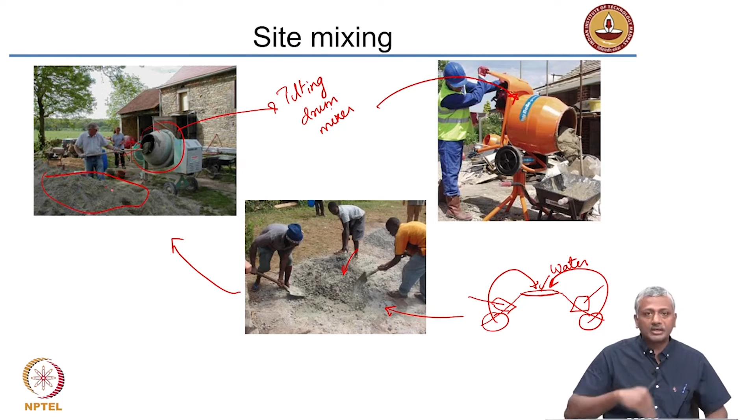This is a more controlled site, as you can see from the proper protective equipment this person is wearing—reflective jacket, helmet, steel-toed shoes, and so on—and the mixer is dispensing the concrete into this wheelbarrow.

That is called a wheelbarrow, and that is what the person uses to take the concrete and deliver it to where it is supposed to be going. A wheelbarrow is used for delivering.

In such cases, after mixing the concrete, these guys will put it in small containers, and you might have seen in our construction sites labourers carrying these containers on their heads, passing it around to the next person, who will finally dump it into the formwork.

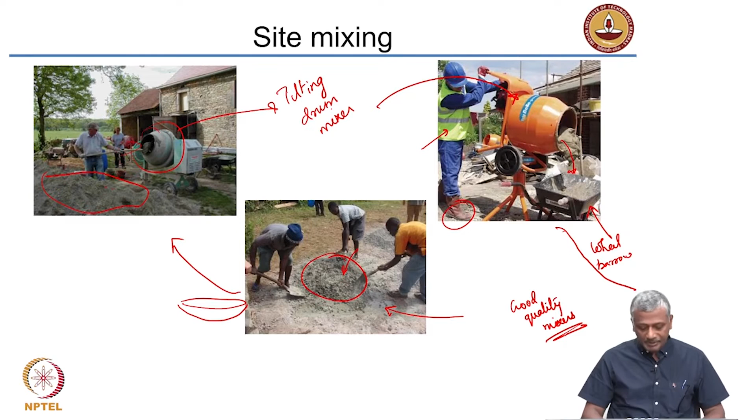Now, when we want to get more sophisticated, we need to invest in what are called centralized mixing plants. I am not saying you can't do this on site—sometimes such sites can also provide good quality mixers that can take care of weight batching as well as very good mixing of the concrete before it is delivered to the site. But in most cases, for good quality, we rely on these centralized batching plants.

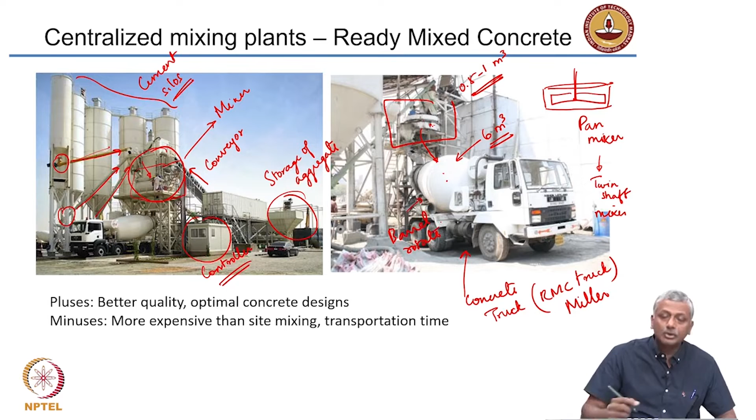The truck has a barrel which can rotate, and this barrel can be rotated to continue mixing the concrete that is getting dumped from the centralized plant.

You may have noticed that when these trucks go from the plant to the job site, they have a very slow rotational movement. Why do they do that? Because they do not want the concrete inside to set or start getting separated.

You want the concrete to be intimately mixed, and when the truck reaches the job site, they rotate the drum at a faster speed. While traveling, it only slightly maintains agitation to ensure the concrete does not set. When it reaches the job site, it is mixed again, homogenized at a much higher speed, and then discharged into the formwork.

Overall, when you use ready mix concrete from a centralized mixing plant, you get better quality and much more optimal concrete designs. You can control the quantity of water and cement to optimal levels. In most cases, these ready mix concrete systems will invariably have mineral and chemical additives in the concrete mix.

Of course, all these processes make it more expensive. Secondly, if your travel time is unpredictable—for example, in Indian cities, traveling from one location to another can be highly variable depending on the time of day—the transportation time could be a drawback associated with ready mix concrete.

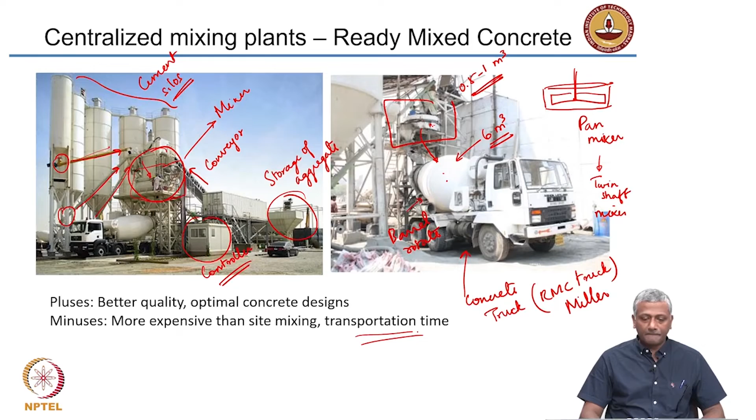Now, after the concrete has been mixed on large sites, you can convey it using different systems. In some cases, you can convey it using conveyor belts.

For example, if you have your construction site where the concrete needs to be delivered over long distances, but they are not so far that you need to send the truck away, you can usually use a conveyor belt.

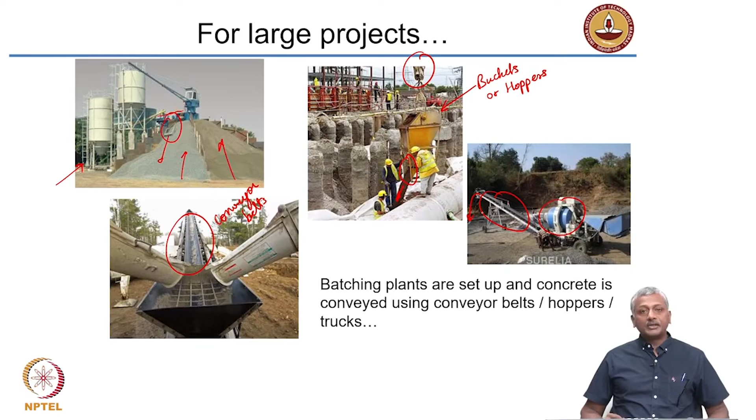Another common thing you see in most construction sites today is the use of boom placers. A boom placer has an extended arm connected to a pipe, and you discharge the concrete into a pump at one end. The boom placer carries it across that pipe and is able to access very large areas. It's major equipment used in most construction sites where a large quantity of concrete needs to be placed today.

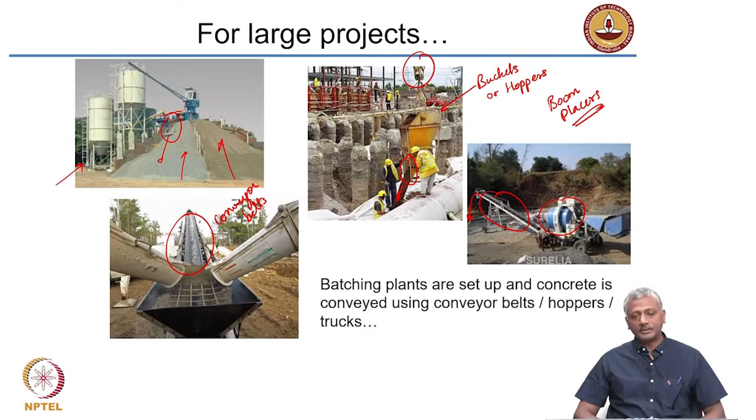So as far as possible, concrete should be poured directly into the desired location. Raking and pushing should be avoided as much as possible. The chutes, which are the pouring devices for the concrete, should pour concrete usually vertically down into the formwork.

In some cases it's unavoidable that you do a slanted chute, for instance when it's coming directly from the truck's dispensing equipment. But when concrete is conveyed through a pipe, the pipe can be made vertical and the concrete discharged vertically. If it's not done this way and the pipe is at an angle, the material may reflect off the bottom and separate into different sizes—coarse aggregate rebounds more, finer material settles to the center, causing segregation. So it's better to discharge it vertically.

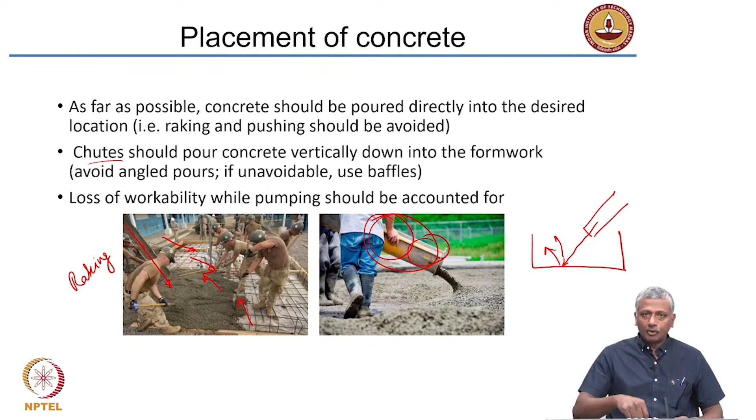Loss of workability may happen while pumping. Imagine a high-rise building: the concrete truck reaches the bottom, but you're on the 15th floor. You create a pipe system that carries the concrete from the ground floor to the 15th floor by applying pressure through a pump that pushes it through the pipe to the top.

As concrete flows through this pipe, there is bound to be some friction, and that friction can reduce the consistency or workability of the concrete. Enough pressure needs to be applied for the concrete to travel through the pipe and come out on the 15th floor with the required workability. So you need to design the concrete at the ground floor with sufficient workability so that any losses from pipe travel can still be compensated for at the point of pouring.

For example, at the point of pouring, if you want a slump of 100 millimeters, you need to design the concrete for conveyance at the ground floor for nearly 150 millimeters, to ensure that any losses in slump during the flow in the pipe can be avoided.

Now I don't know how many of you are aware of this. For Burj Khalifa, the tallest building in the world, concrete was pumped over a vertical distance of 600 meters, from the ground to a level of 600 meters. That's the world record in pumping concrete to a vertical distance. That concrete was such that it could actually compact on its own. I'll show you an example of that. You had to maintain that workability at the point of discharge on the 600 meter level, and that's not an easy job to do. So you need to plan that quite well, design the concrete appropriately, and so on.

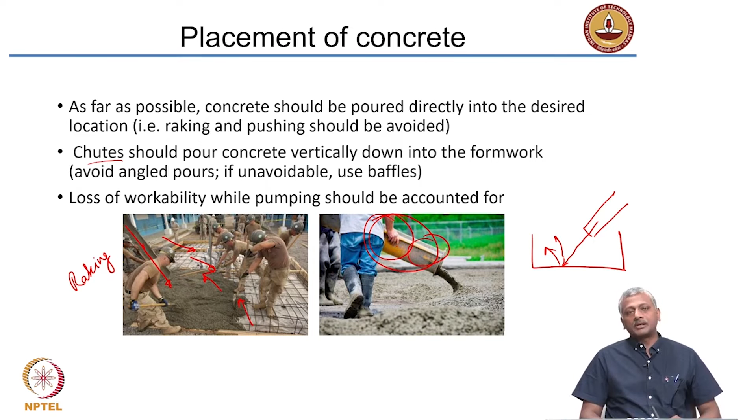So you can have problems while placement. If the concrete has not been designed properly, you can get problems like segregation and bleeding. What is segregation? Essentially it's caused by settling of the coarser particles down while the lighter or finer particles float on top. So usually you have the cement paste floating on top and the aggregate settled at the bottom. This happens when you have insufficient fines in your mix. That means either the fine aggregate content is low, or you may have less amount of cement in the mix, and that will cause this problem of segregation.

If you have too much water, you will cause what is called bleeding. Water basically is the lightest ingredient of the concrete, so because of gravity, the water rises to the surface and forms a layer there. That's basically called bleeding. While this bleed water on the surface helps to some extent in finishing and reduction of shrinkage cracking, the problem is it's going to locally increase the water to cement ratio, because more water is there, less cement is there. So the water to cement ratio at the top of the concrete slab will be higher, and a higher water cement ratio automatically gives a lower strength. So this is not a desirable situation. You don't want segregation and bleeding to happen on the site.

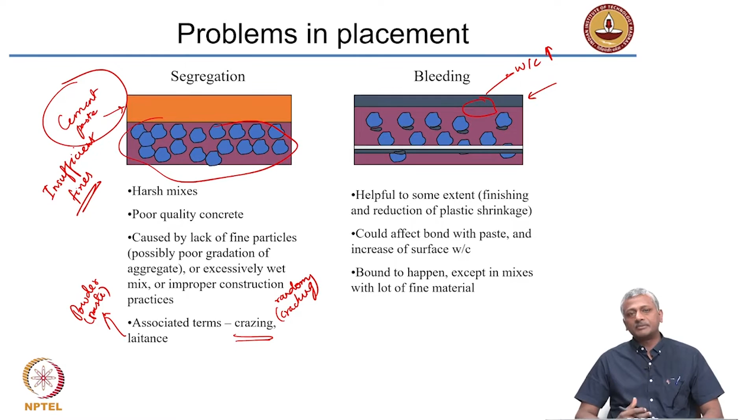Very often when you get cement paste on the surface — I told you before that cement paste shrinks — if you form this layer of cement paste on the surface, it will shrink and then start getting cracked. That cracking is called crazing. You get these crazing cracks, and sometimes the cement paste will dry off as a powder and come out, and that's called laitance. The cement paste dries off as a powder and basically gets removed from the top surface. That's called laitance. Crazing and laitance are a major problem — crazing is basically random cracking of the top surface. So if you lack fines in your mix, either fine aggregate or enough cementitious materials, you are going to cause these problems of segregation and bleeding.

So you have placed the concrete now. The next step is to compact it, because you have a reinforced concrete structure. When you are pouring the concrete, it may not properly go around the reinforcement and encapsulate it. To ensure that happens properly, you need to compact it, or consolidate it. Compaction or consolidation is done with the help of vibrators, and vibrators can be of different types. You can have an external vibrator, which is basically a device attached to the surface of the concrete or to the formwork itself, causing the entire formwork to shake. That's called an external vibrator.

Or you can have an internal vibrator, like what these people are doing. You see this guy holding a needle — that's a needle vibrator. It's a vibrating needle again here. So a needle vibrator basically is a rod of steel which is made to vibrate at a very high frequency — we are talking about 4000 to 5000 hertz. It vibrates at a very high frequency.

So what it does is loosen up the concrete so that it starts flowing. Concrete which is very stiff, if it's dumped into the formwork, will not go anywhere. But as soon as you put your vibrator inside, vibrating at such high frequencies, it loosens up the aggregate and gets the concrete to flow, and that creates the compaction. External vibrators are placed on the formwork or on the surface and cause the concrete to vibrate and compact. Internal vibrators are the needle vibrators, which are poked into the concrete. These needle vibrators are also called pokers.

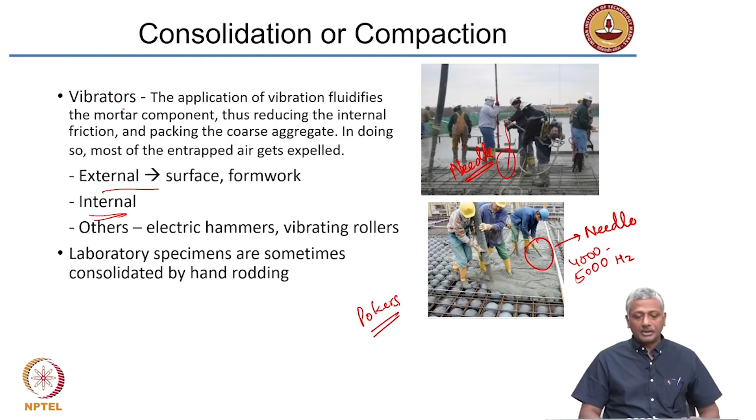So I was saying that you need to establish ways of putting concrete with minimal vibration. So here, before I go to that, I am just showing you a scenario of how this needle vibrator basically is used. The vibrator basically pushes into the concrete. So if you have the first layer of concrete here and the second layer that is coming on top of it, the vibrator should go all through the depth of the second layer and just into the first layer to ensure that there is good jointing between the layers. Otherwise, you will have a problem of creation of cold joint.

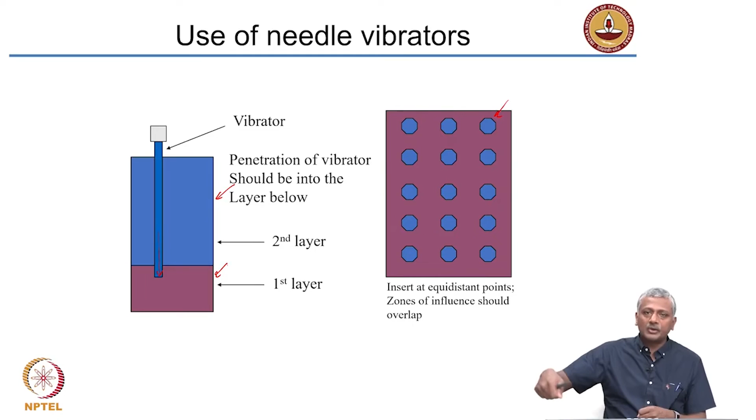Second, the vibrator needle should be placed at equidistant intervals into the concrete, and that ensures that you have proper compaction all through. Depending upon the area that you want, you can have a zone of influence around the vibrator that ensures that the concrete around that zone gets compacted properly. So you need to calculate properly as to where you need to put the next poke of the vibrator.

A self-compacting concrete basically compacts under its own self weight. It does not need additional vibration for compaction. So this use of self-compacting concrete can bring down the number of vibration-related injuries on a job site. So it is highly preferred now in many construction sites to use self-compacting concrete.

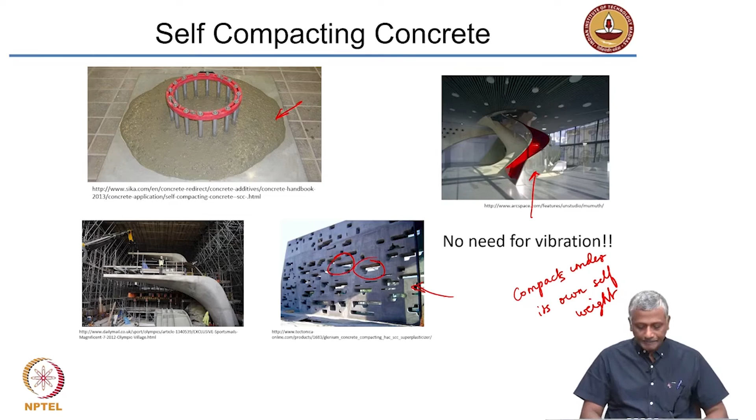After the concrete has been poured and compacted, it needs to be leveled to ensure that the top surface is exactly where you want it, and then finished. The leveling process can be done with the help of screeding. Screeding basically is removal of excess material from the concrete surface, so you fill up more than what you want and remove the part that is not necessary. Finishing can be done using several methods, one of which is called floating.

I will show you an example of this in the next couple of slides. You have troweling. You can use these trowels, which you see a mason handling in a typical masonry job also. That same trowel can be used to finish the surface of the concrete.

Now, in some cases you may want to texture the surfaces. Texturing is very interesting. I will come to applications of texturing in just a minute.

The initial finishing operations, after you level the concrete, are done immediately after completely placing and consolidating the concrete. This is followed by a final finishing. Final finishing is done when the concrete is able to withstand foot pressure.

The workman should be able to stand on top of the concrete slab or structure that has been laid. This is only valid in the case of slabs. In the case of beams and columns, you don't have to stand on it to compact or finish it. But in slabs, large area structures, you may want to stand on it to do the final finishing operations. So the concrete should be somewhat stiff to resist the pressure of the foot on the surface, because the workman has to stand on it.

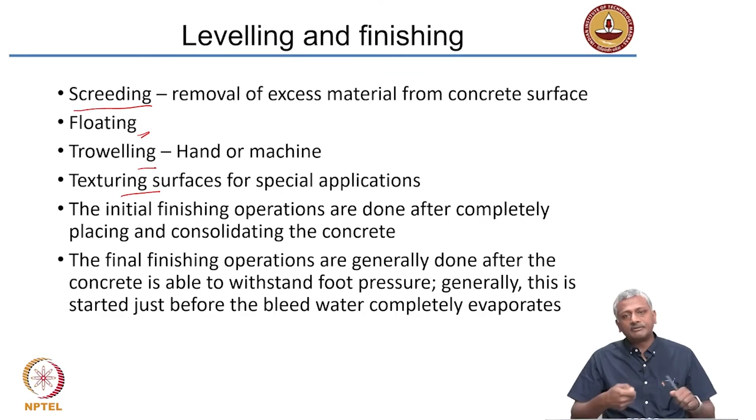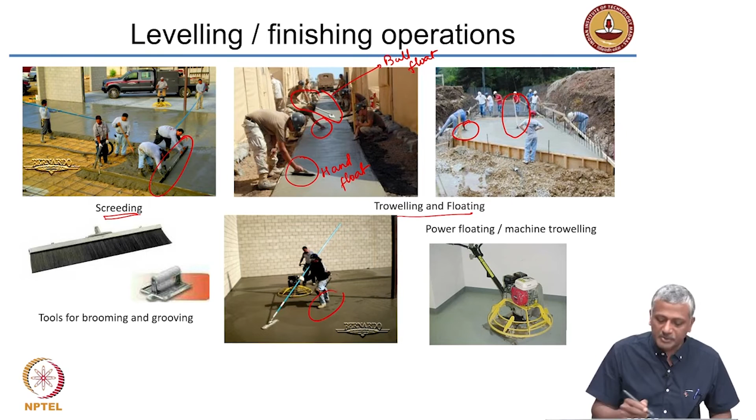This is the initial finishing operation, where they are not standing on the concrete, but here you see this person standing on the newly laid concrete, and he is doing floating. This person here is carrying an instrument called a power trowel or machine trowel, also called a power float.

It has these paddles at the bottom, which are rubbed on the surface; the paddles rotate with the power of this machine, driven by a motor attached to it, and then they finish the top surface. This is the final finishing operation, and this is the initial finish.

After the finishing is done, during final finishing, you may want to do some texturing. Sometimes you may do texturing like drawing lines on the surface. You may have seen this in concrete pavement slabs, where on the top surface they have these lines separated by a fixed interval.

I will come to that in the next slide. Or sometimes you may want a slightly rougher surface with a broomed finish. You take a broom with sharp bristles at the edge and rub it on the concrete surface to give a broomed finish. In most cases, this is done for pavements and parking areas.

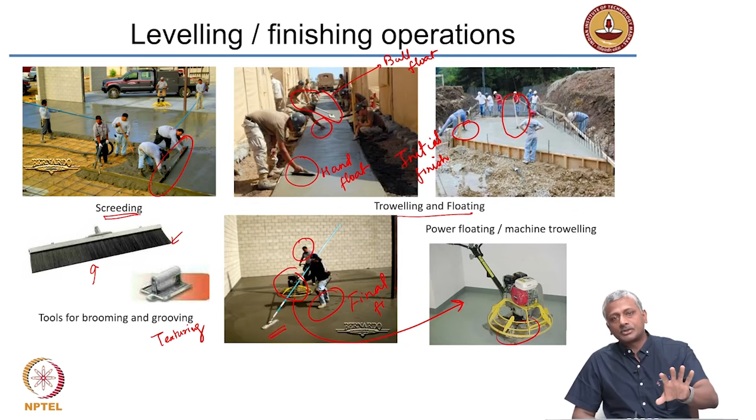The texturing is usually done to provide certain characteristics to the top surface to make it suitable for specific applications. In concrete pavements, you may see the top like this, with lines that have been cut or grooved into the concrete—this is basically called tining.

As your vehicle passes on top of the road surface, this tining or the grooves, made with a grooving tool, ensure that you get the required frictional resistance, and also help reduce the amount of hydroplaning.

That means when water gets in, in wet conditions, vehicles can skid off. The provision of this tining or these grooves ensures the effect of hydroplaning reduces significantly. This also reduces the tire-pavement interaction noise. If there is noise, as you may have seen on highways, a lot of noise is generated when vehicles move on the surface. These grooves or air pockets on the road surface absorb a lot of this noise and reduce the amount of noise generated from highways.

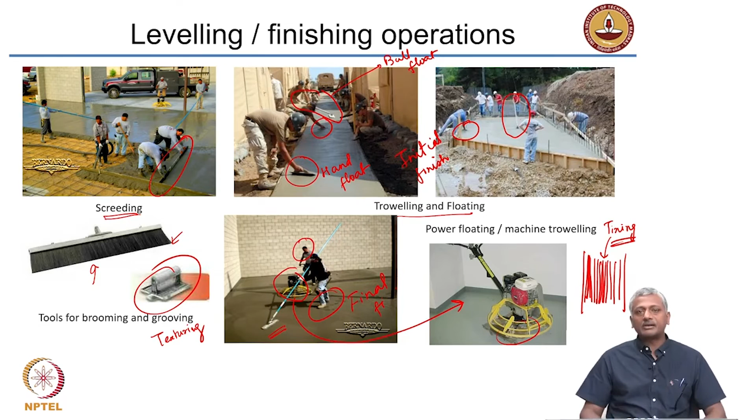After finishing is done, the next step is curing, and curing is absolutely necessary for ensuring proper hydration of the cement. You put cement, water, stone and sand into the concrete. The cement and water have a certain proportion, such that the water is required for reacting with the cement to produce this hardened concrete structure. If this water starts evaporating before the cement fully reacts, it's not going to be good for your concrete. So to ensure that cement hydrates properly, you need to cure it.

Curing also helps prevent shrinkage cracking and thermal cracking. At early ages, a lot of heat is involved, and the concrete needs to come down to ambient conditions. It starts shrinking as a result of the hydration. Curing ensures there's sufficient moisture supplied from the external environment, which reduces the effects of thermal and shrinkage cracking.

So in simple terms, concrete curing simply means keeping the surface of the concrete moist during the hardening process of the cement. That's basically curing. Continued hydration means the more the cement hydrates and reacts, the more durable the concrete you get.

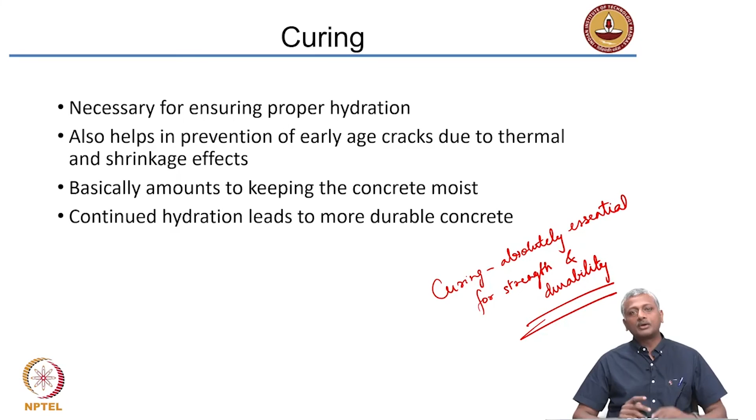Curing is absolutely essential for strength and durability. If you don't cure, you will not get a concrete structure that gains required strength, and more importantly, you will not get the required durability. So continued curing, or keeping the concrete surface moist while it's hardening, is very important.

Now there are different ways to do this. For horizontal members like this, you can simply create an embankment and store water on top. That's called ponding. Sometimes you may just spray water using a water spray or a pipe.

Sometimes you can fog the environment using very fine sprays of water, which creates more or less like a mist around the concrete. This is typically done in many laboratory conditions.

In some cases you may want to do a wet burlap or jute bag curing, also called Hessian cloth curing. You have wet jute cloth kept on the surface of the concrete, but you have to ensure this cloth is always wet. Otherwise, if the cloth dries out, the concrete will eventually dry too. In many instances, columns especially are covered by this wet jute cloth type curing, but you need to ensure the jute cloth is wetted from time to time to maintain the wetness properly.

In some conditions, it's enough to just put some covering on the top surface to restrict evaporation, for example plastic sheet covering that reduces evaporation, or insulating blankets like this. Now, why do you need insulating blankets? They not only cover the surface and prevent water evaporation, they also ensure that the heat generated because of hydration is kept inside.

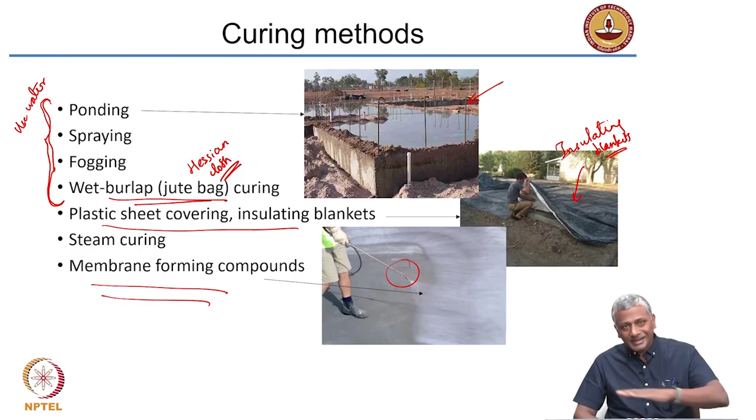Membrane forming compounds, like what is being sprayed here on the surface of the concrete. Before the concrete surface becomes totally dry, you spray this membrane forming compound, which ensures there is less evaporation of water from within the concrete. So it maintains that humid condition inside the concrete. That's also another way of curing, and increasingly today, because of the shortage of good quality water on construction sites, many sites have adopted practices using membrane forming curing compounds. They are also called curing compounds.

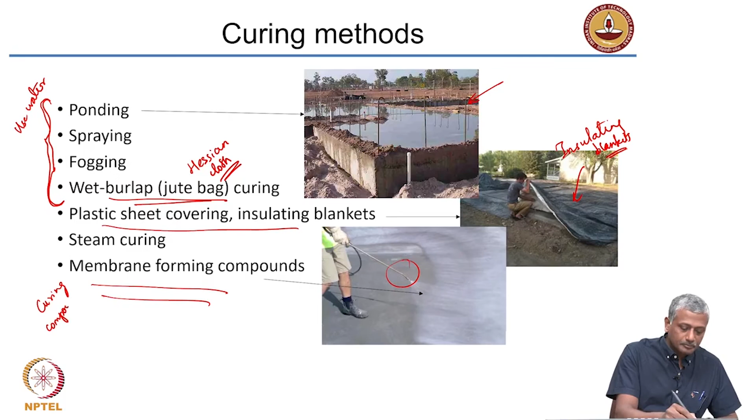Now, how long do you cure? That depends on what you require. One factor is you need to maintain a certain strength level in the concrete. Typically it is enough to cure concrete until 70% of the design strength has been obtained.

Now how do you know when that is obtained? You can't obviously be testing concrete so often. So in most cases, curing is done until 7 days. Again, in most cases the design strength of the concrete is specified at 28 days. So at 7 days you have already attained nearly 70% of the design strength.

So in most cases, with plain OPC concrete, you may want to cure for 7 days. But when you are using PPC, Portland Pozzolan Cement, or PSC, this curing duration increases to 10 to 14 days, because these cements are slower to reach the strength level of OPC.

Please remember, the use of blended cements like PPC and PSC leads to stronger and more durable concrete in the long run. But to get there, you need to ensure the curing duration is increased compared to OPC. You need to cure for longer to attain the same performance at early ages, but that guarantees much better performance in the long term.

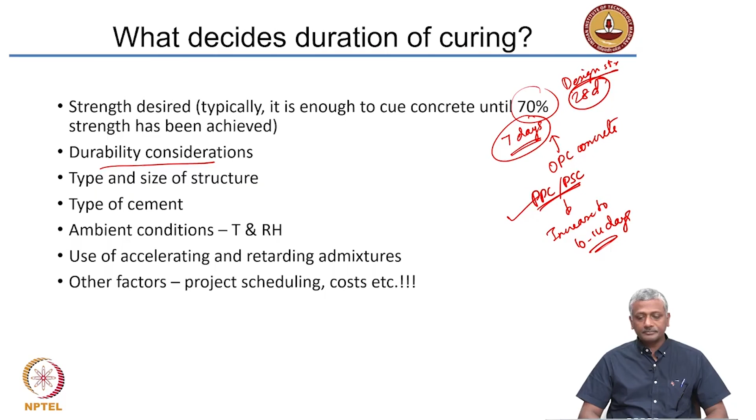Now on the job site, there has to be quality control done to ensure that the concrete supplied meets the demands of the design. One of the common tests done on site is the slump test, to determine the workability. But apart from the slump test, you also need to determine the strength somehow.

Typically the removal of concrete from the mold is done at 1 day, meaning the day after the concrete has been placed it is removed from the molds, and then cured underwater in most cases. At most construction sites, curing is done underwater, and the cubes are cured until the age of testing, usually 7 days or 28 days.

Apart from strength-based tests, you may also do other quality control tests like workability. As I said, every test batch you do the slump test. Sometimes you may also want to determine the air content in the fresh concrete and the unit weight of the fresh concrete, to ensure they are within the required limits for your construction site. But strength is always done. Slump and strength are always done at all construction sites.